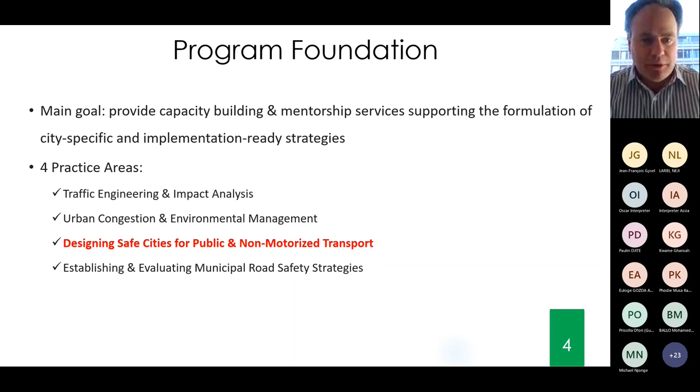So for those of you particularly interested in traffic safety, please note that we will meet again on March 8th, where we will progressively transition from the type of engineering and design good practices, which we will be covering today, to leadership and safety strategies at the urban level for African cities.

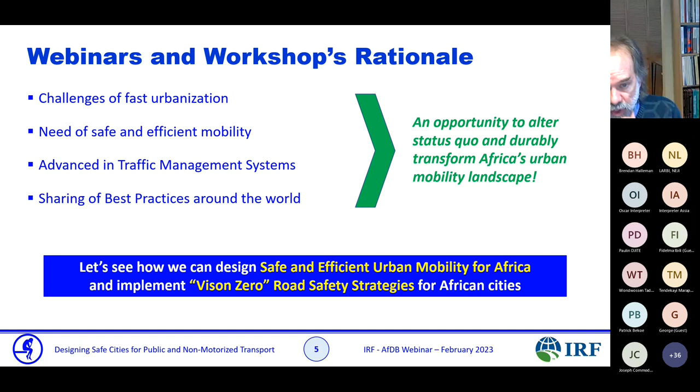So that's what we're going to be doing today. This first webinar will be talking more about engineering. The next webinar in March will be about Vision Zero and the kind of strategies and political requirements necessary for implementing Vision Zero for African cities. So we'll be talking about planning and engineering, focusing on vulnerable users, which are pedestrians, cyclists, transit users, and motorcyclists.

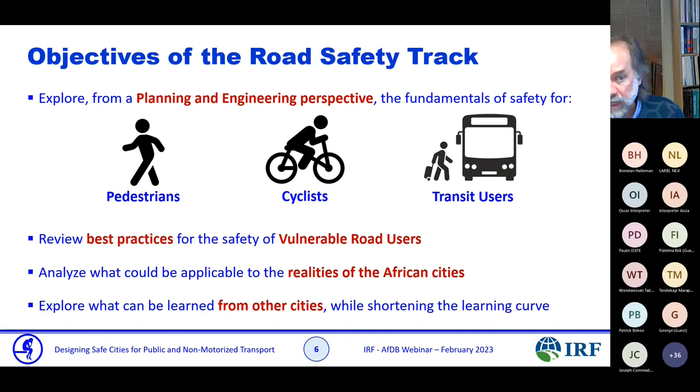We'll review best practices for those and try to analyze what could be applicable for the reality of African cities, and explore what can be learned from other cities while shortening the learning curve, so we can leapfrog a couple of steps.

This first webinar, the one today, will be exploring more the threats to life facing a wide number of road users in African cities. And I think that's very important. Being a vulnerable user, the key word here is vulnerable. How can we protect pedestrians, cyclists from being hurt by heavier, faster vehicles?

So we need to look at their needs. They need to be able to go from point A to point B in a safe manner. We'll talk about how we can separate VRUs from heavier and faster vehicles, and how we can set up appropriate speed limits. Putting a speed limit which is not appropriate, not credible, not in relationship or coherence with the road geometry doesn't make sense at all, because it won't be respected.

And also we'll look at different street guidelines and how we can apply them. But first, I'll just spend a few minutes talking about the stats on the African context and road safety. Even though Brendan talked about it, it's good to look at that in more detail.

So today, or in 2025, most of the world's biggest cities are in Asia. We're talking about Tokyo, Shanghai, Delhi, Dhaka, but by the end of the century, it's going to be in Africa. That's where the biggest cities are going to be concentrated within the next 50 or 60 years, and that's going to highlight even more the necessity to have safe and efficient mobility, especially for vulnerable users.

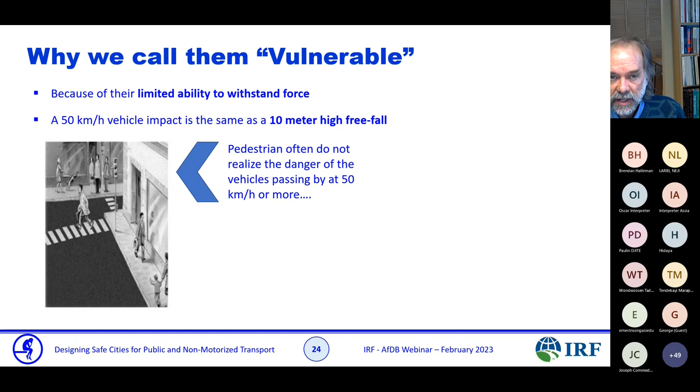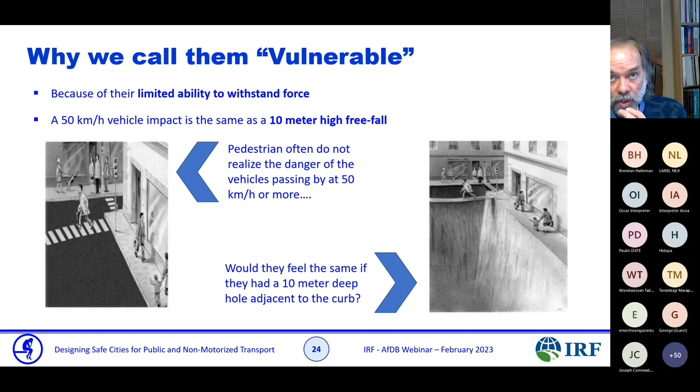Why do we call them vulnerable? Because they don't have the ability to withstand the force of impact. At 50 kilometers an hour, a vehicle impact is the same as falling from a 10-meter high wall. It's hard to imagine, so I'll show you a picture. Pedestrians don't realize that walking on the curb or crossing the street is exactly the same as being next to a 10-meter deep hole adjacent to the curb. If people could see a deep hole right next to them, they would be scared and would not get close to it. But we don't see it, we don't realize it, so we walk very close to the car, and people get hurt. We should know that and be aware of it.

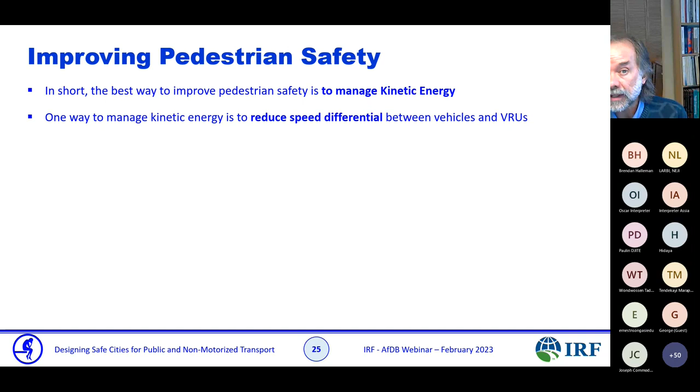How do we improve pedestrian safety? The best way is to manage kinetic energy. One way of doing it is to reduce the speed differential between vehicles and vulnerable users. The less the speed differential, the less likeliness of an impact causing injury or death.

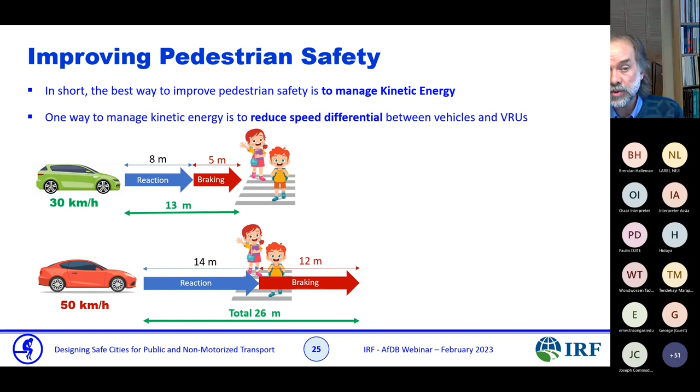For example, if there is an upcoming vehicle at 30 kilometers an hour and the driver sees children crossing the street, it takes about 8 meters of reaction time to step on the brake, and another 5 meters to stop, which leads to 13 meters, and it would stop in time. At 50 kilometers an hour, it's not going to work, because it takes 14 meters to react and another 12 meters to brake, which is 26 meters, meaning they're going to drive over the kids.

That's what it's all about, and that's why we're talking about reducing speed. It makes a lot of difference. The slower the vehicle, the more chance you have to avoid a crash, and if there is a crash, the impact is going to be less. At 30 kilometers an hour, your chance of survival is 90%. At 50, it goes down to 20%. At 70 kilometers an hour, you have no chance of surviving because your body cannot sustain the impact. You are going to die, for sure.

That's why we reduce speed and push for reducing speed near schools, hospitals, playgrounds, and other areas with pedestrian activity. This is something we should look into for African cities, because there are a lot of activities alongside the roadways, and vehicles driving by at 80 or 100 kilometers an hour very close to vulnerable users. They have absolutely no chance of survival if a vehicle hits a pedestrian on the side of the road.

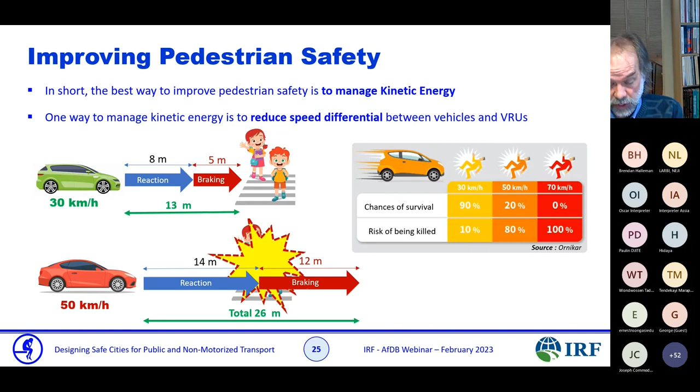So how do we improve pedestrian safety? First, we manage speed, adapting speed limits to the street function and local context. Speed needs to be in accordance with what's happening there. One issue in African cities is national roads crossing villages where the road stays the same - straight roads going through with just a 30 kilometers an hour sign. But if the road itself doesn't change, if there's no geometric design showing a difference, people will drive fast no matter what the sign says. We'll show you how to address this.

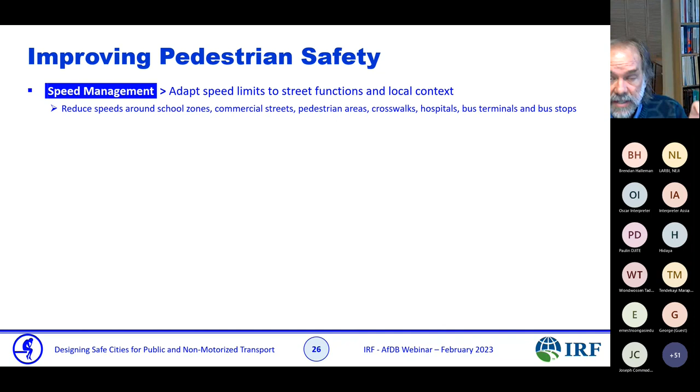We need to reduce speed around school zones, commercial streets, pedestrian areas, crosswalks, hospitals, bus terminals, and bus stops - all places with vulnerable road user activity. The other thing is signs and markings. We need to make sure motorists are informed about pedestrian activities. There are many signs and markings that exist to warn drivers, such as crosswalks, which can be controlled or uncontrolled.

We have stop lines, signs for schools, playgrounds, health centers. We need to use those. The idea is to tell motorists, watch out, they are vulnerable users. As I said, some people won't look at that, because some motorists won't, but most motorists do, and we need to talk to the majority of them. We need to tell people to behave properly, and when it is well done, people do behave properly.

The other thing is physical separation. We need to separate the motorized vehicle flow from pedestrians, cyclists, and motorcyclists through overpasses, tunnels, curbside barriers, bicycle paths and lanes, dedicated lanes for motorcycles, and I'll show you a couple of pictures. All of those actions are improving safety one way or another. There is no one solution, but it's a recipe of many elements that's going to improve safety. That's what we look at. So we can implement a lot of small things that are going to improve safety overall.

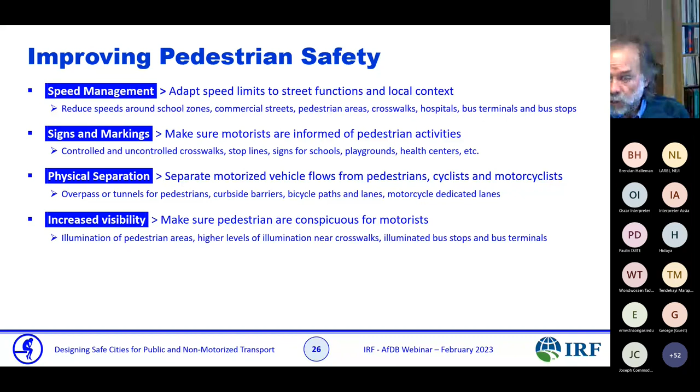Another point is to increase visibility. Very often pedestrians are not seen. And when a pedestrian is hit, one of the things the motorist says very often is that I did not see him or her. So we need to make them conspicuous for motorists. We need to have proper illumination of pedestrian areas, higher level of illumination near crosswalks, illuminated bus stops. We need to find ways to make sure that VRUs can be seen.

The last point, which is not the least, is appropriate infrastructure. We need to make sure that pedestrians can walk safely and away from traffic. We need to design paths and curbsides and areas where they can walk safely. Those need to be large enough, they need to be free of obstacles.

We need to have space for parking, because if it's full of parked vehicles, it's not going to work. It needs to be well drained and well lighted as well. If there are puddles of water, pedestrians are going to go around it, and they're going to walk on the road to avoid walking in the water.

So we need to have a network that connects major points of interest, being commercial, institutional, health, and making sure that pedestrians can go from one to another or reach out to the public transit access point easily.

Another point is universal accessibility. That is allowing people in wheelchairs, or people who have difficulty walking, blind people, deaf people, to be able to walk and use the network, and have proper guidance in order to avoid them being in conflict with motorists.

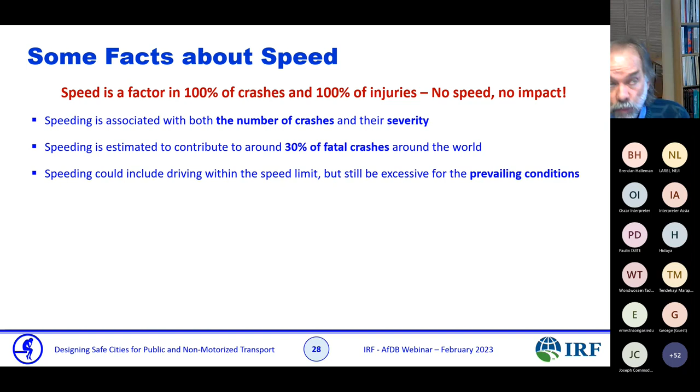Speeding could include driving within the speed limit, but still be excessive for the prevailing condition. And we see that very often. That's why actually in many cities in the world, the speed limit in cities is limited to 50 kilometers an hour, while now it has been reduced to 40. And some cities, for example, Amsterdam in Netherlands, is reducing it to 30 kilometers an hour. So we are realizing that if there are vulnerable users, we need to reduce speeds, and we'll see how to do this.

Some part of the road should be dedicated for mobility. Those are major arteries, freeways, where vehicles can drive fast. But on those, we should not have vulnerable users. So when we have vulnerable users in local streets, in smaller arterials or collectors, we should make sure that speed is lower.

I talked about kinetic energy. I'll come back to it very fast, but many people don't know the formula. What I would like to show here is that the kinetic energy of a vehicle is proportional to the square of its speed. So the risk of death for a pedestrian is not twice, but it's 4 times greater when hit by a vehicle at 65 compared to 50, because it's not linear. So that's something we should take into account.

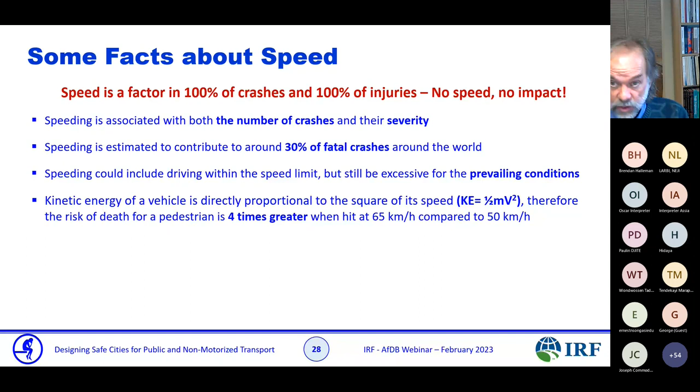Reducing the speed from 50 kilometers an hour, where your chance of survival is about 20%, to 30 kilometers an hour raises your survival chance to 90%. That's exactly why we talk about reducing speed near school zones and where there are vulnerable users.

Travel speed also affects the driver's ability to accurately and reliably process information. The faster you go, the narrower your visual field becomes, so you don't see the roadsides well—you don't really see them at all when you drive fast. So you're not able to see danger, hazards, or vulnerable users on the side of the road.

However, high-level information processing is critical in a demanding environment when there are VRUs. That's another reason for reducing speed in areas where there are pedestrians, because the driver's ability to process information is slower. So speed management is absolutely essential to protect VRUs.

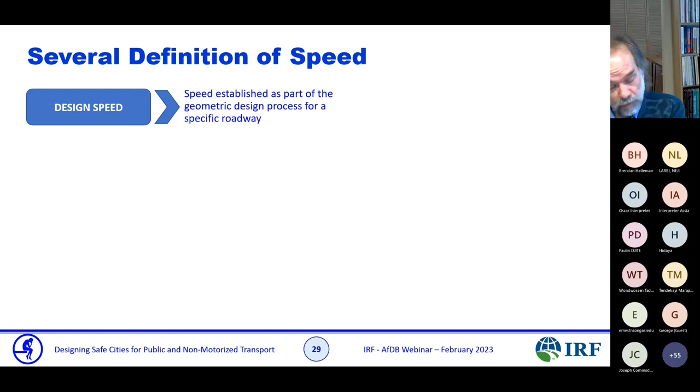There are several definitions of speed. I won't go too much into detail, but just to make sure you understand what we're talking about: design speed is the speed we use as part of the geometric design process to design a road. It could be 100 kilometers an hour for a freeway, or 30, 40, or 50 kilometers an hour for a local street.

Operating speed is the speed at which vehicles are observed during free flow conditions, which is not the same as the design speed—it could be higher or lower, but it's the speed at which vehicles are actually driving. For example, on major arteries in urban cities, on a wide boulevard the speed limit could be 50 kilometers an hour, but because it's straight and wide with wide lanes, people tend to drive faster. On the other hand, on very narrow streets the speed limit can also be 50, but the operating speed is much slower because motorists are afraid of hitting something—there are parked vehicles, pedestrians—so they drive slower.

So it's not related to the speed limit, which is a posted speed we can see here—that's the maximum lawful speed for a particular location as displayed on the signs.

Statutory speed is the speed limit established by the governing agency. For example, in France the speed limit for freeways is 130 kilometers an hour. In the Emirates, it's 160. In Canada, we take safety very much into account, so the speed limit on our freeways is only 100 kilometers an hour. So it depends on the country and the governing agency.

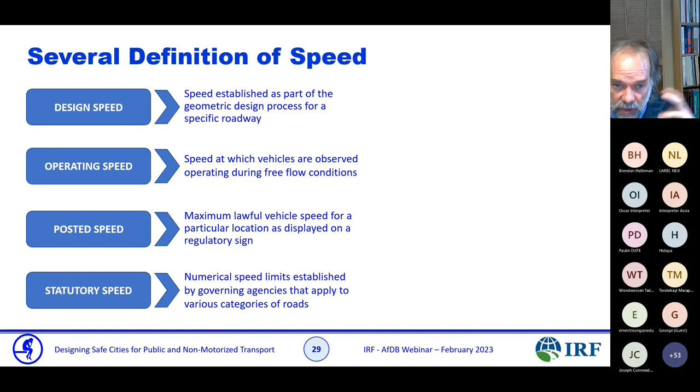That's why pedestrian safety has two levels, and I'll talk about it a little more: it has to be top down, where government takes action, but it also has to be bottom up, where we can have local action directly on the street—concrete action to improve safety.

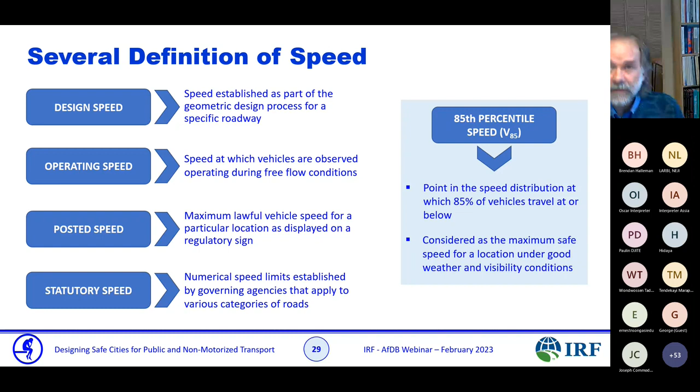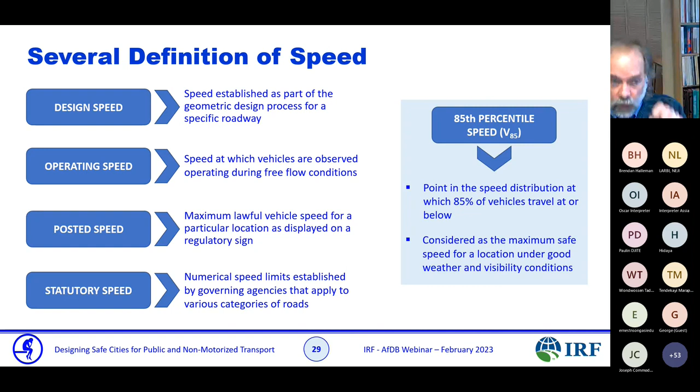The last point I wanted to talk about is the 85th percentile speed. That's something we use very much in engineering—it's a point in the speed distribution at which 85% of vehicles travel at or below. It's considered the maximum safe speed for a location under good weather and visibility conditions. So those are just facts to keep in mind when you do your design, when you think about your own area—how can you improve? You should know those definitions of speed and the right one to use.

There are a few consequences of speeding for drivers. As I said, it reduces the visual field and the ability to accurately and reliably process information. There is more distance traveled during the perception and reaction time because we are driving faster, stopping distances are longer, and there is greater potential for loss of control of vehicles.

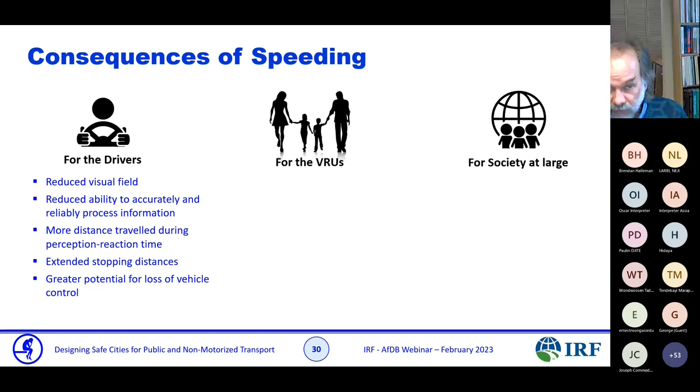For VRUs, there is an increased feeling of insecurity when vehicles are speeding, reduced time to cross the street, reduced time to react to an event, increased severity of injuries, and obviously increased death probabilities in crashes. And for society at large, we should take this into account as well: more speeding means more fuel consumption, more noise, more vibration, more pollution—we should keep the environment in mind.

So what's happening in speed management currently is that the speed limit used to be aligned to driver preference for high speed travel.

As roads were being built and vehicles became more performant, people tend to drive faster and faster. It took a long time before we started limiting and reducing speed on highways. Before that, it was open, and in some countries it's still wide open. For example, in Germany on the Autobahn, you can drive as fast as you want on some sections, which is kind of scary. But statistics show they don't have more accidents than average. However, when they do have accidents, they are really bad, usually because of the speed.

Another point which is quite interesting is that most drivers tend to underestimate the likelihood of an adverse event that may cause harm. Most drivers don't think about a hazard.

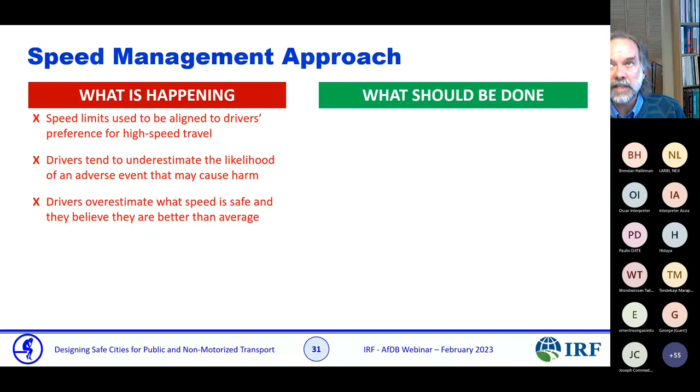So people tend to underestimate the risks. Another thing drivers tend to do is overestimate what speed is safe for themselves and others. There were many surveys showing that people believe they drive better than others. Most drivers think they are better drivers than average, which is obviously not true. When we see the number of accidents that happen, it's not good.

And the last point is that drivers are not good at perceiving many risks, in particular when there are hazardous roadside objects. People think in series, not in parallel - we can do one thing well at a time, not too many things at once. When there's a lot of action, a lot of stimuli for the driver, they cannot perceive the risk properly.

So what should be done? We should manage speed, and the focus is not to lower the speed all over. Despite what I said previously, the idea is not to put everything at 30 kilometers an hour. That's not the point. The point is to match mobility needs with the surrounding environment, the infrastructure, and the safety. And that's not easy to do.

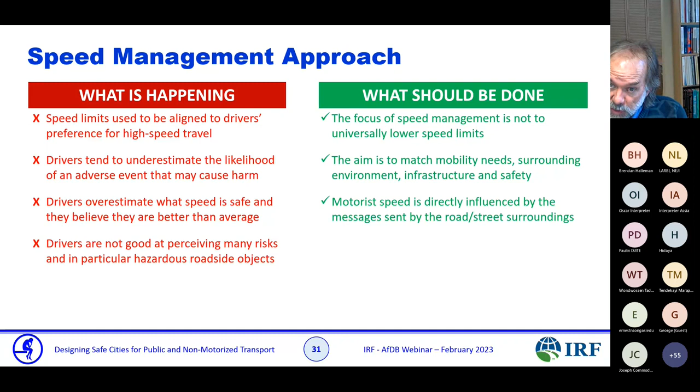Motorist speed is directly influenced by the message sent by the road and street surroundings. So here we are talking about coherence between geometry and speed, and that's what we do. I'll show you a couple of examples of how we do this.

But we should let the road talk to the motorist. If the road is straight and wide, people are going to drive fast. If it's narrow, if there are obstacles on the road, if there are markings and obstacles that push them to reduce speed, they're going to do it much more than any sign or marking on the road.

And speed limits must be established to take into account the human biomechanical tolerance limit. It's really crazy to allow vehicles to drive over 50 kilometers an hour near vulnerable users, because the biomechanical tolerance of a human is not going to work if they get hit - they're going to be injured severely or die. So that's what we need to avoid.

So notwithstanding the extent of speeding on our roads, surprisingly, the posted speed limit is still acknowledged as being the most powerful mechanism for influencing speed choice. So we should use that. We should post the right speed limit, but not do it by itself - we should complement the posted speed limit with a lot of engineering, with different solutions, traffic calming devices that I'm going to be talking about, that will help reinforce the message that the posted speed limit does.

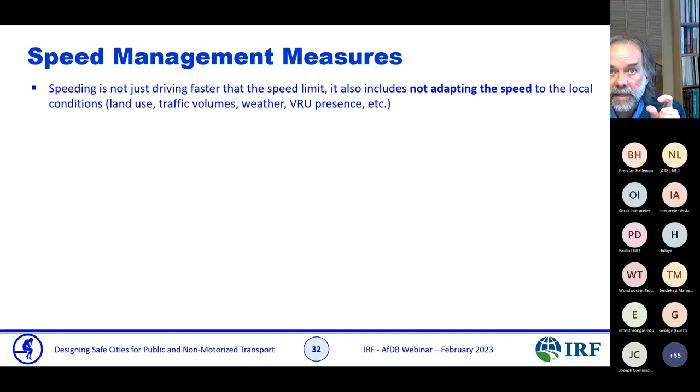So speeding is not just driving faster than the speed limit - it also includes not adapting the speed to local conditions. That's important to know. Speed limit setting should take into account the type of road user, as I said, and the safety quality of the infrastructure. Sometimes the infrastructure does not allow for higher speed because it's not in good shape, it's not well drained, and we should take this into account.

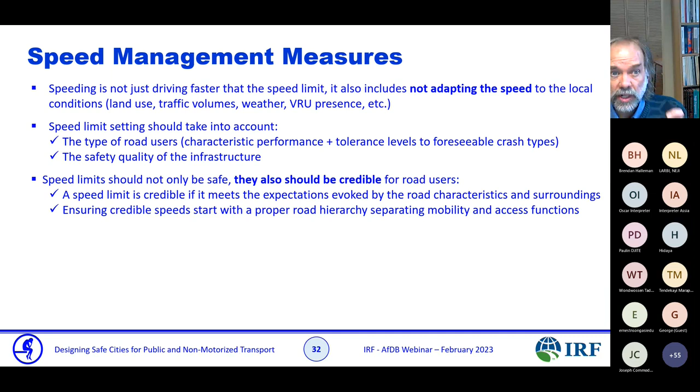Speed limits should not only be safe, they should also be credible for road users. That's an extremely important point here. A speed limit is credible if it meets the expectation evoked by the road characteristics and surroundings. I don't have it with me, but I took a picture of a road in Latin America.

I was driving on a highway, which is wide and straight, and at one spot there was a speed sign which said speed limit 30 kilometers an hour, which didn't make sense at all. I stopped there because I wanted to see if it had any effect, and nobody reduced speed because it doesn't make sense. So if it's not credible, motorists won't respect it.

We need to make sure it's credible, making sure we use the right road hierarchy, and we see the difference between mobility and access function. I'll talk more about this in a couple of seconds. So speed management requires several initiatives: setting appropriate and credible speed limits, adapting infrastructure and road geometry to the targeted speed, and ensuring adequate enforcement of the speed limit.

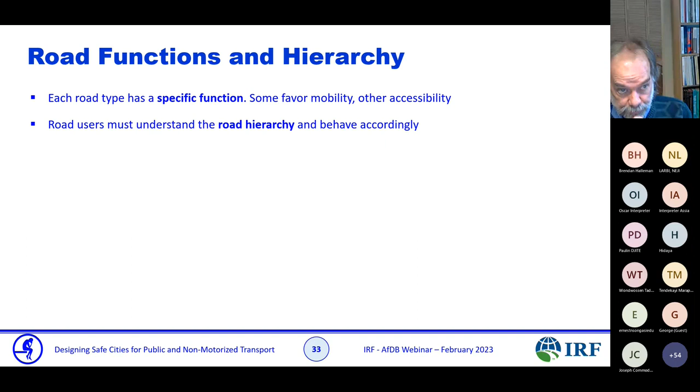So each road has a specific function. Some favor mobility and some favor accessibility. Road users must understand the road hierarchy and behave accordingly. Vulnerable road users and commercial activity must be controlled to reduce the incompatibility of mixed functions. That's very specific to Africa. We should look into that specifically.

Road designers and land planners should stop favoring motor vehicles to the detriment of vulnerable road users. That's been one of the main trends of perhaps the last 20 years, and the Decade of Road Safety has been implementing change. We have been focusing very much on motor vehicles. The car was the king of the road. It should not be this way anymore.

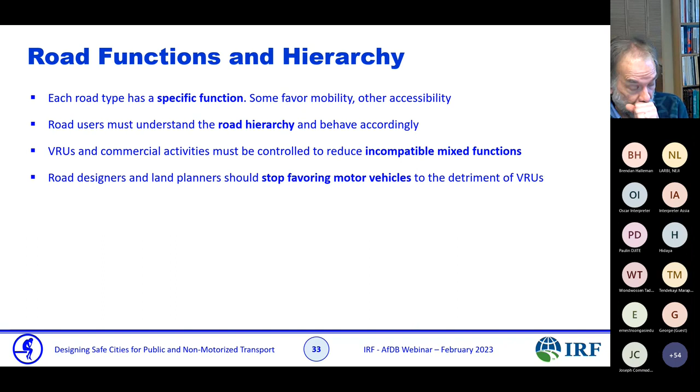We should favor much more active transportation. We should protect vulnerable users because it's good for health, because it's what most people can do, walk and use their bicycles, and it's cheaper and better for the environment. So motor vehicles and cars, I'm not saying they are not good and we should not use them, but they should not be at the center of all we do.

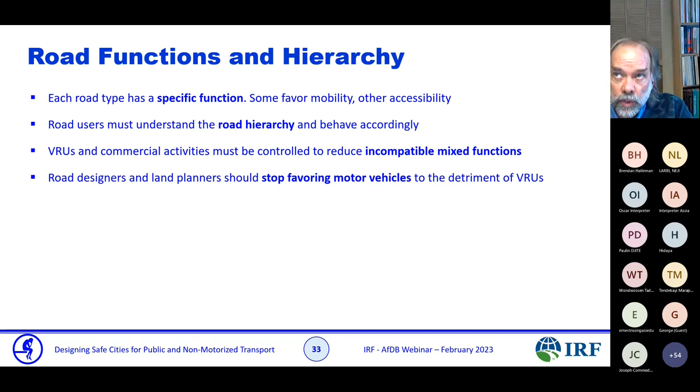What should be at the center of what you do is the human. We should have a human-centric design and reflection. That's my next point here. Road designers and land planners should develop a human-centric approach in their work. We should develop, I'll show you how, a bottom-up vulnerable user scheme.

So start from what the local conditions are, what are the possibilities to work specifically on the local area to improve the pedestrian network, sidewalks, curbs, signing, design. And at the same time, we should have top-down government initiatives and bylaws that will help that.

The other thing we should try to do is make the best use of advanced technology. As you know, we are going into the Internet of Things. Vehicles are going to be more and more connected to the road and to other vehicles, and we should try to see how we can use that to improve and enhance mobility and safety, which is quite interesting. So what I'm afraid of, and that's why I wrote this last sentence here, is that we could leapfrog, because technology allows that.

However, it's important to progress step by step. In many African countries, for example, the phone network has not been well developed, and you went directly from not having phones to mobile phones with Wi-Fi, skipping the fixed line network that we did have, which is fine.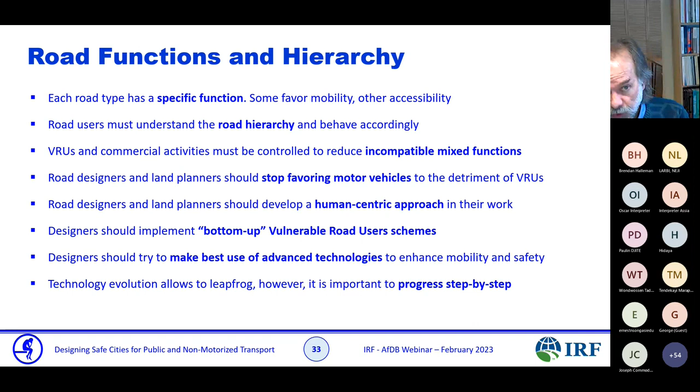But by jumping over that, sometimes you are jumping over very important actions. So remember that in the way you work, you need to progress step by step and make sure you can use experience from others and what they've done, as I said before, on the positive side, but also on the negative side. Road hierarchy, here I show you a quick picture.

This is what road hierarchy looks like. On the left-hand side, you can see a freeway. You can see it has separate lanes. There are no accesses. Cars can drive fast. There are no vulnerable users on the road. So that's what it looks like.

On the top center here, you've got a highway or main arterial, which is a wider road. You have controlled access, you have traffic lights, and usually the vulnerable users are separated. You've got curbs and sidewalks, you've got bicycle lanes. Then in green here, you've got collectors, which are narrower streets with curbs.

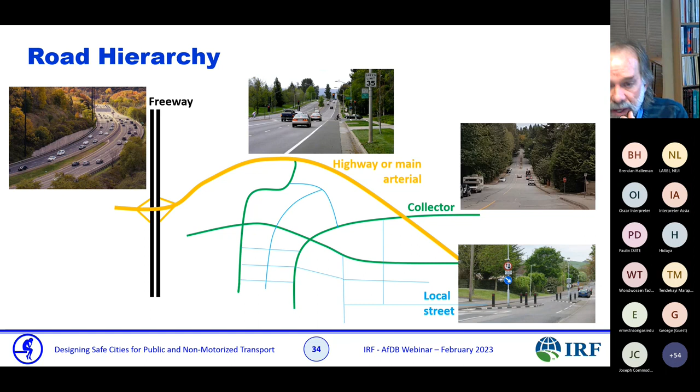You've got parked cars, and eventually you can come to a local street where you can have very specific traffic calming devices you can implement. Here you can see a chicane that helps reduce the speed of vehicles.

Very often, national roads cross linear villages without any modification of the road geometric design. So we should warn motorists that you are entering a village, entering commercial activities. You should have markings, signs, speed bumps, gateways that will help you, telling people to watch out for vulnerable users.

Speed limits are not credible due to a lack of coherence with the surrounding environment. There are too many uncontrolled roadside activities along the road, and uncontrolled commercial activities and street vendors within the right-of-ways. That's something we should look into and try to control.

Also, there is an issue with parking space for motor vehicles. They need to stop their car, and very often there is no space, so they park directly on the road. So, speed management program process, how do you do it?

Well, you need to identify speeding issues, determine partnering agencies—that's something that should be done in coordination—identify countermeasures, implement countermeasures, and evaluate the project and program to make sure that it's working.

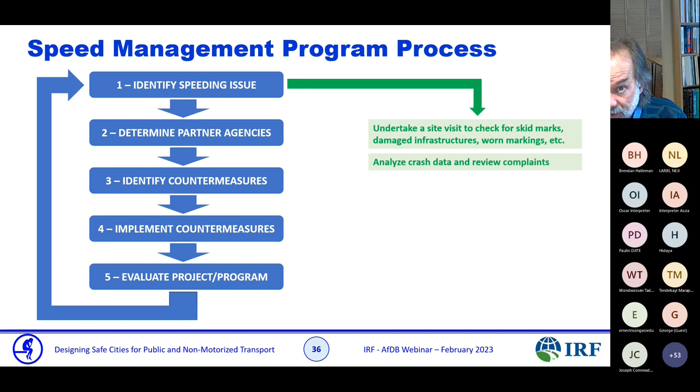You go there and look at what's happening. Are there skid marks, damaged infrastructure, worn marking, crash data? Do you have crash data, and do you have people's complaints that cars are driving too fast?

You should do a speed spot check and validate the data. Is it an issue or not? Very often people perceive speed as going too fast, but when you do a spot check, it's not going too fast—it's just a perception.

You should analyze the coherence between posted speed limit and the surrounding environment. If you have a national road with a speed of 60, 70, or 80 kilometers an hour near commercial activities and vulnerable users, it's not proper—it's not coherent. You should search for unexpected conditions or types of activities.

For example, VRU presence. You should review the relevance of information conveyed to the motorist about the area. Is the motorist aware of commercial activities and vulnerable road users? Is the motorist well informed in advance of a danger?

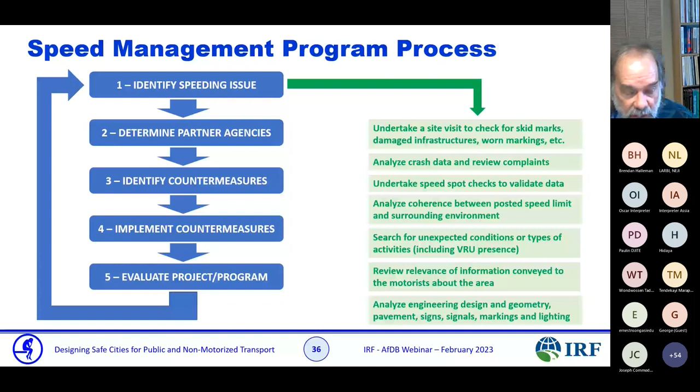And of course, engineering design: geometry, pavement, signs, signals, marking. I'll show you examples in a couple of minutes of all of what I'm talking about, with pictures.

Speed management tools, we'll talk about this also in the next webinar, but we should implement a safe system approach. A safe system approach is safe road, safe speed, safe vehicle, safe people. It's not only safe road or reducing speed—it's a global approach that takes into account the different elements: vehicle, people, speed, roads, and making sure that all of them are safe.

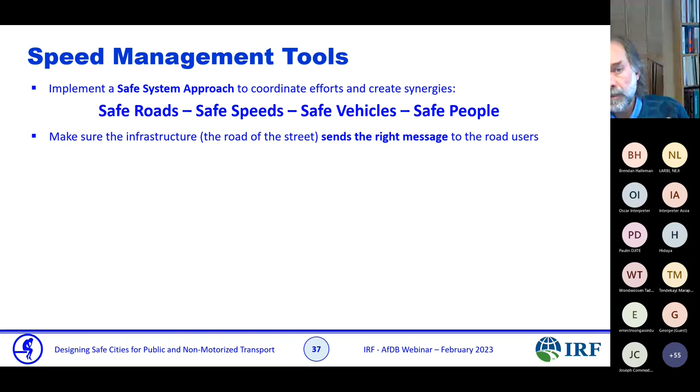We should make sure the infrastructure—as I said, and I know I'm repeating myself, but I do it on purpose—sends the right message to the road user. We need to help drivers see and understand the risk by posting credible speed limits. If it's not credible, they won't look at it and they won't understand the risk.

We should have awareness campaigns. We should enforce the speed limit with police control and fines. I know that's very difficult in many low-income countries. In many countries there is a lot of corruption, and people can easily, instead of paying the fine, give a little money to the policeman and say, let me go. That's very much linked with the income of the country. I'm fully aware of that, but it's something we should work on.

One way to improve safety is both the carrot and the stick. The carrot is, we should congratulate people for behaving properly, but we should use the stick to tell them that's not the way to do it. That's not an easy balance to get, but we should be working on that.

We should educate all road users. As I said, pedestrians and cyclists are not licensed—they don't know the rules of the road. We should inform them and make them aware of the danger of the road.

We should impose vehicle speed reductions through implementation of traffic calming devices—we'll be showing that in a couple of seconds. So the way of looking at it is, first we'll start with adequate engineering and design speed.

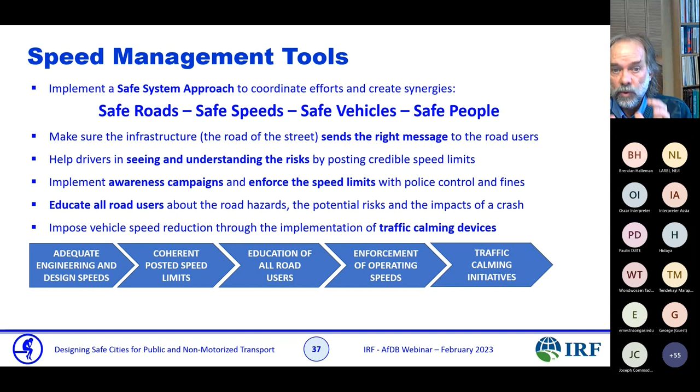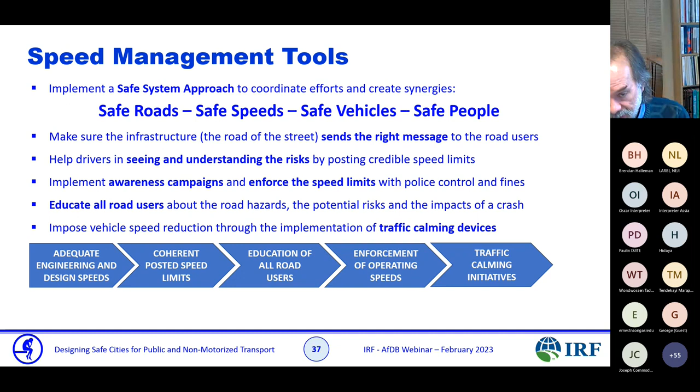We'll make sure that we have coherent posted speed limits. We need to make sure that all road users are well educated, that we've got proper enforcement, and we should start putting in traffic calming devices. On top of that, we should have self-explaining roads—roads that talk to the motorist by themselves. Another point is forgiving roads, because we know that people make mistakes.

So if a motorist or a vulnerable user does make a mistake, is there a way to avoid a major injury or death? Can we implement physical constraints to make sure that if a vehicle goes off the road, it's not going to fall off a cliff or drive onto the curb? And the last point is making sure we've got proper emergency services if there is an accident. It's after the fact. The best idea is to avoid an accident, but if there is one, how can we limit the consequences? We'll talk about all this in the next webinar.

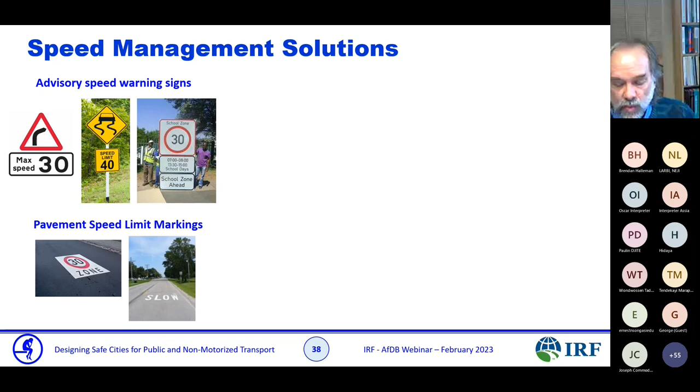I've seen it actually: road signs are being stolen by people because they need the metal and they can sell it back. So one way of dealing with this is painting on the road. It's very difficult to steal painting on the road, whereas it's easier to steal signs. So that's another way of doing it.

One thing that's very efficient, and I know it's not easy to implement in many countries, is speed-activated signs. You show the speed limit and you show the speed of the vehicle, and that's extremely efficient. When people see they're driving much faster than the speed limit, they're going to reduce speed, because by themselves they believe they are within the speed limit.

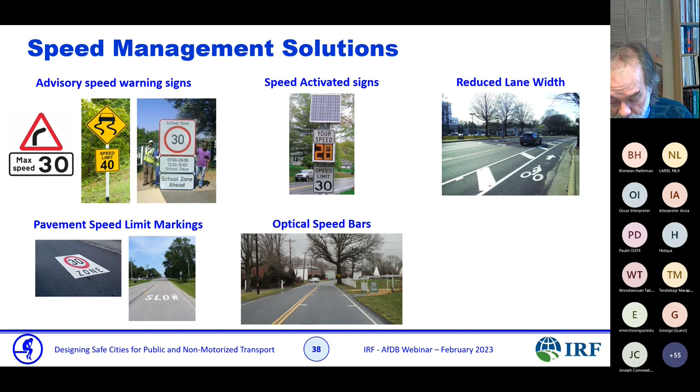But if it flashes at them, it's going to improve and they're going to reduce speed. Another thing which is working well is optical speed bars. Those are small bars along the road, as you can see in the picture, and that creates an effect of narrowness for the driver. By instinct, the motorist is going to reduce speed because he feels it's narrower, and that's quite efficient. Reducing lane width is the same thing, it just makes people think it's narrower, so they drive slower.

Another thing is center islands, raised medians. This gives pedestrians a chance to cross the road in two parts, and while they are waiting in the middle of the road, they are safe because they're on an island and somewhat protected.

Another thing is road diet. For many years we've been increasing the number of lanes, and in some cities like San Francisco, Los Angeles, Toronto, you get highways of 12, 13, 14 lanes, which doesn't make sense because it just creates congestion. So one of the things we do is what we call a road diet. Instead of having two lanes per direction, as shown in the picture, we put in one bicycle path, one lane per direction, and a center lane that allows double left turns. That's one thing we could do, and it helps reduce speed.

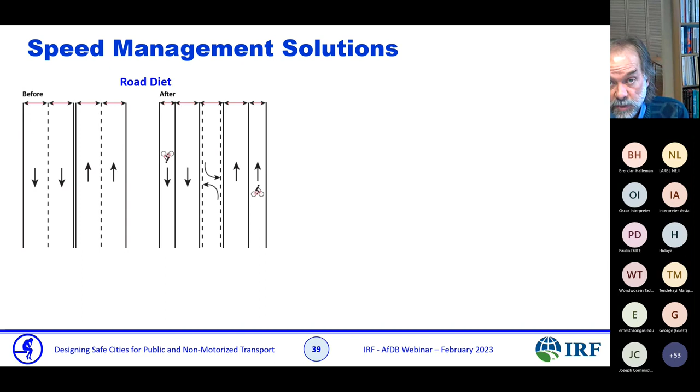Roundabouts are very efficient at reducing the number of conflict points. In comparison to a right-angle intersection, roundabouts are much safer, and they impose speed reduction as well.

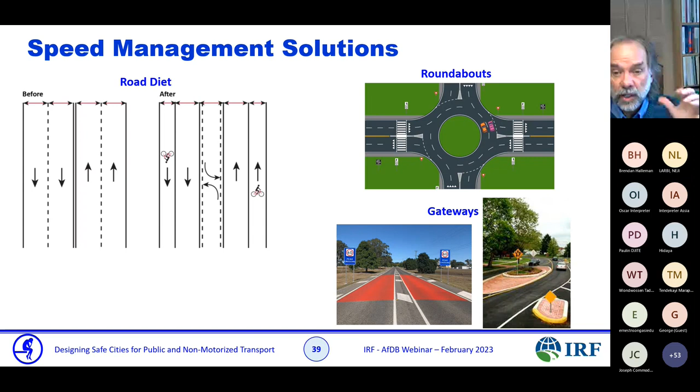Gateways are a way to say, watch out, you are entering a zone where the speed is going to be different, you should be reducing speed. Putting up a sign by itself is not going to be efficient, but gateways, where the driver can see or feel that the road is talking to him or her, make a huge difference. Gateways should be used in African countries much more than they are. That's one of the best, or the most efficient, devices that should be used in African cities.

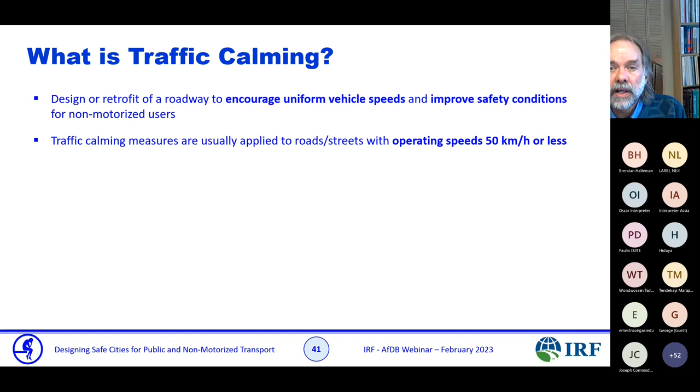Let's look at traffic calming quickly. Traffic calming is designed to encourage uniform vehicle speed and improve safety conditions, obviously for vulnerable road users, by implementing devices. They are usually used on streets or roads where the speed is lower than 50 kilometers an hour. Obviously, you cannot put a speed bump in the middle of a freeway, it doesn't make sense, you would create accidents. It has to be in places where the speed is already lower.

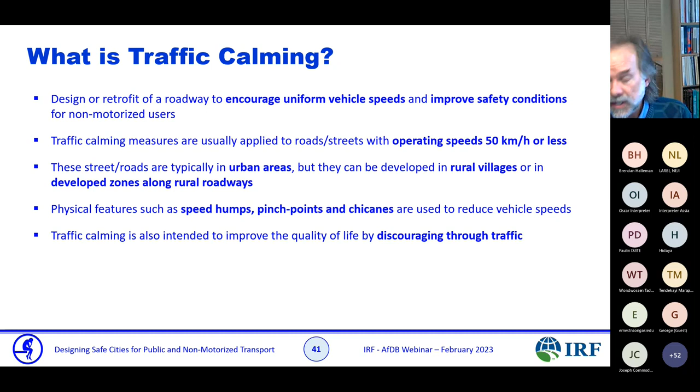Usually it's done in urban areas, or it can and should be done in rural villages. But if you do this, first of all you should have a gateway that tells motorists, watch out, we are going to be reducing speed. You need to make sure motorists reduce speed before you implement any traffic calming device. These can be speed humps, pinch points, chicanes, or other methods. I'll show you a couple of examples. The idea is also to discourage through traffic — sometimes people use local streets to bypass congested areas, and you want to discourage that by prohibiting through traffic.

Another important point is that this should be a community-wide strategy, not a local street-by-street initiative. You should not put a speed bump somewhere on a street by itself. That should be done within a neighborhood-wide vision.

Traffic calming solutions, I'll show you a couple. Speed hump: here you can see the picture of the solution, and the drawing on the left-hand side, a top view at the same time. Speed humps are very efficient to reduce speed.

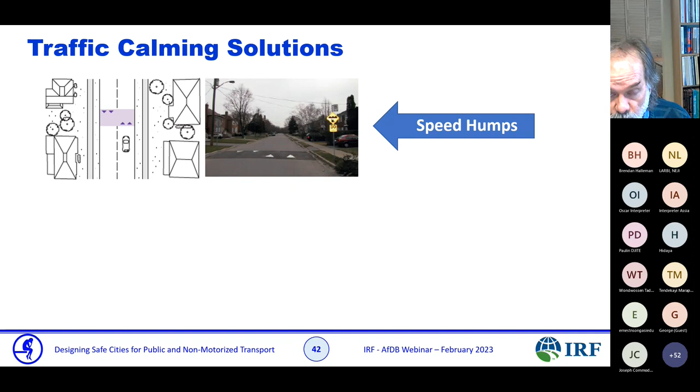Raised intersection, sometimes called speed tables. The intersection itself is raised, which protects vulnerable users and forces vehicles to reduce speed. Otherwise, they're going to break the car.

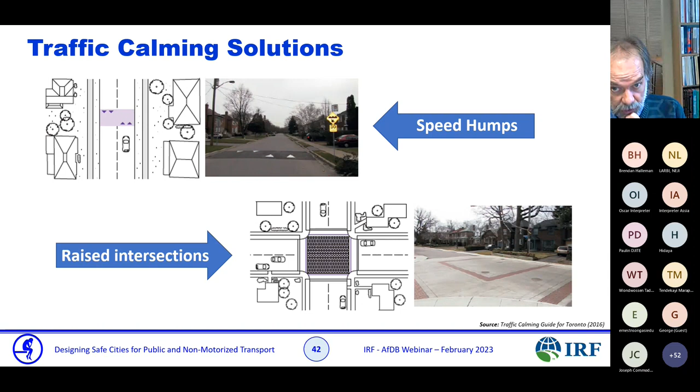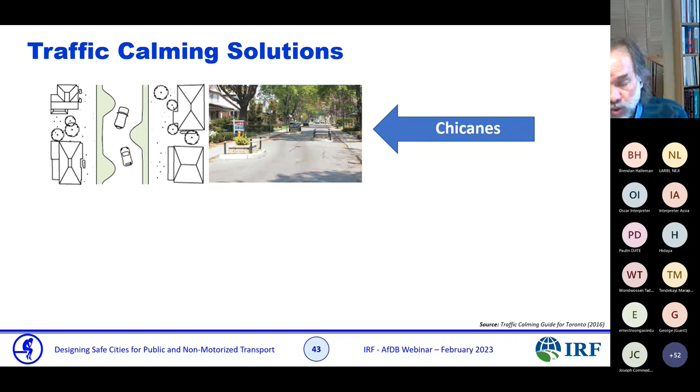Chicanes: here you can see the driver has to drive around obstacles, what we call chicanes, reducing speed to go through those left and right turns. We can do that through curb extension as well—we just extend the curb, and that provokes some kind of chicane, or half chicane perhaps. That helps very much.

All those examples, by the way, are taken from the city of Toronto, which is about 500 kilometers from Montreal, where I live. Traffic islands.

So you put some obstacles on the road, and of course those need to be conspicuous. I mean, motorists need to be able to see them quite well, but that's very efficient to reduce speed.

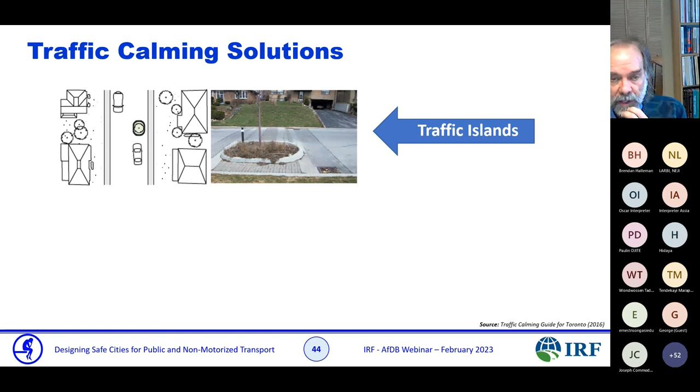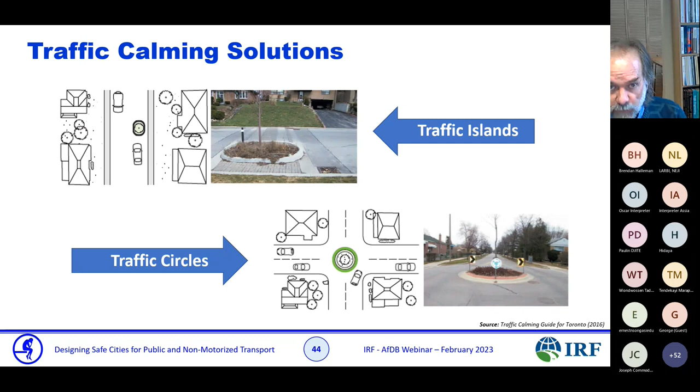Small traffic circles just impose some kind of movement on a driver, so they're going to be slower by using it. Bumps: in our cities, very often we've got alleys behind streets, often used for services and emergency services, and people tend to use them as shortcuts. So we put bumps so they reduce speed, because very often kids are playing in the alleys.

Curb extensions have two advantages: they reduce the crossing distance for pedestrians, so it's safer—they are less exposed—and at the same time they permit parking, protecting parked vehicles.

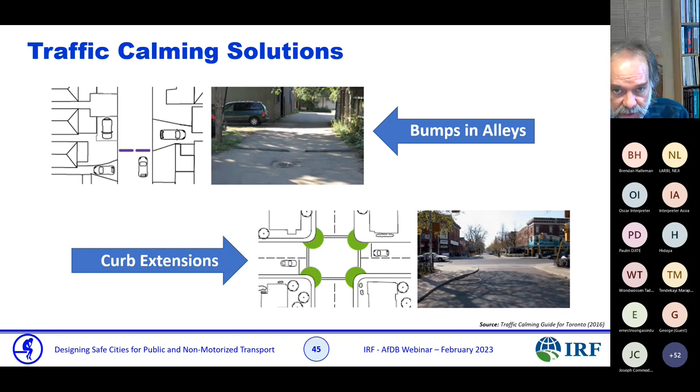On the previous one you saw curb extension, but curb radius reduction works as well, because the smaller the radius, the slower the speed. When it's almost a right angle, you cannot turn as fast as when the radius is higher.

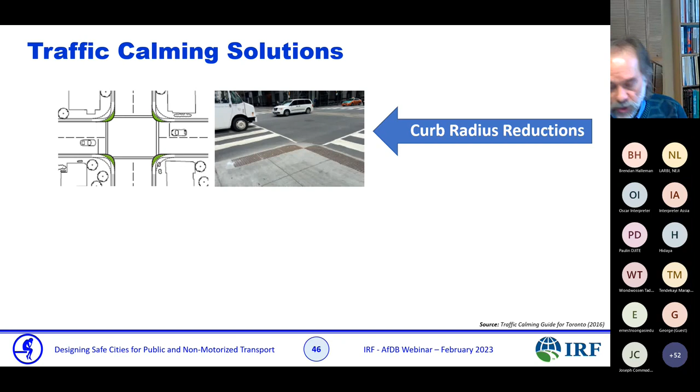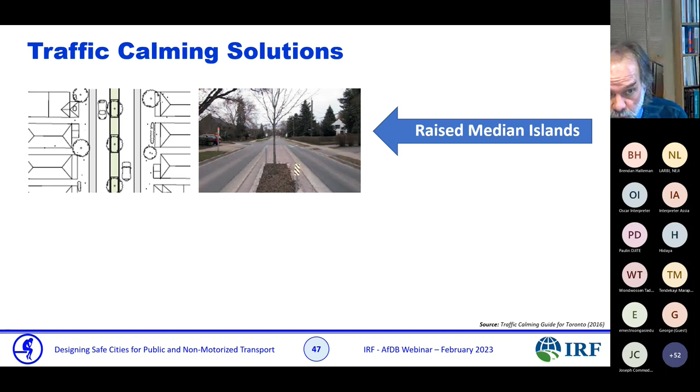Raised median island, I told you about that—it protects vulnerable users, as well as narrowing the lane width.

Directional closures: what we use sometimes is to make one-way streets, and one way of doing it is just putting an island, which closes one side of the street.

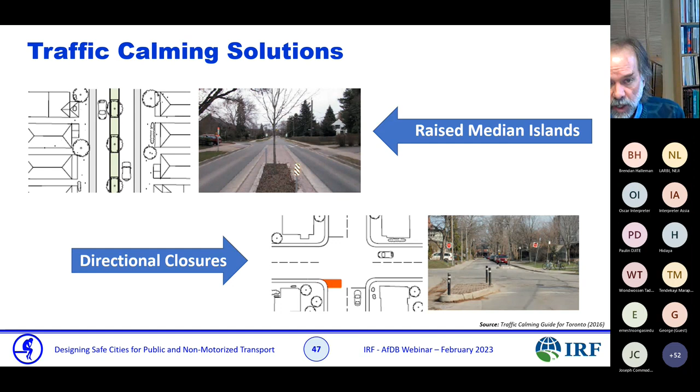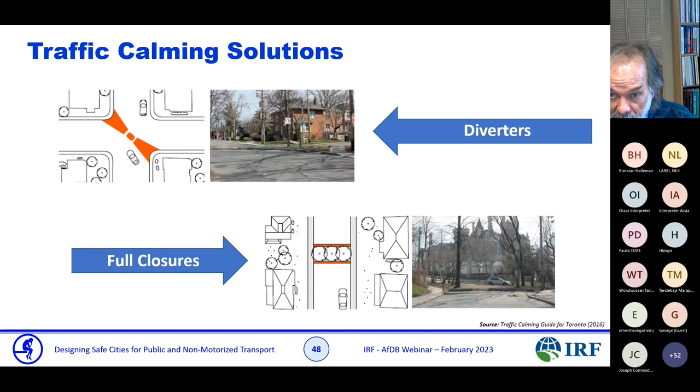Or full closure: in many cases they decide to close streets, and the street could become completely closed to vehicles, becoming a pedestrian street. We'll see a couple of examples of that.

Raised median through the intersection always works quite nicely. Speed humps, mini roundabouts, traffic circles—as you can see, we have a lot of devices we can use.

As a traffic calming device, I'll show you applications in the African context. That's the last part of the presentation.

Before that, what are the weaknesses that need to be improved, that we need to work on? One thing is the institutional framework for traffic management, which will be the object of the next webinar. It's quite poor in general in Africa, and we need to improve that.

We need better data. We don't have reliable data on traffic, safety, or mobility. The more data we have as engineers, the better we can work. There is also a lack of demand forecasting and analysis.

If we can forecast, and we need data to forecast, if we have data we can forecast, and we can forecast, we can design. So it's all linked. Traffic impact analysis, that's the other side of the webinars we are working on today. I'm on the road safety side, but traffic impact analysis is the other pillar. If we have proper traffic impact analysis for developments, you can right away implement the proper design.

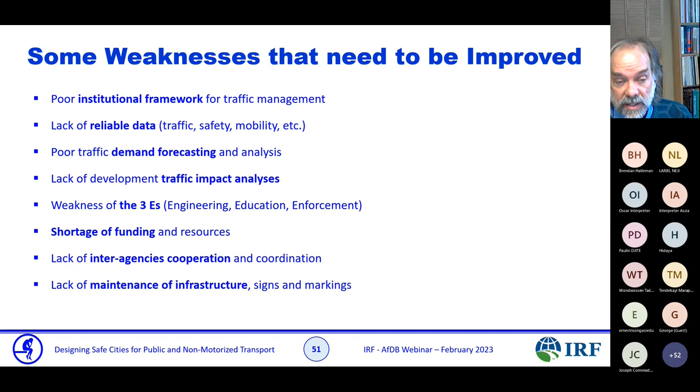The other thing is the famous 3E's: engineering, education, and enforcement. It's weak in Africa in terms of all three E's, both engineering, education, and enforcement. We need to reinforce that. Obviously one way of doing it is having more money. So there's a shortage of funding, we know that. There's also a lack of inter-agency cooperation and coordination. If agencies could work better together and cooperate and coordinate, that would help. And maintenance, infrastructure maintenance, signs and marking, that's something we need to work on.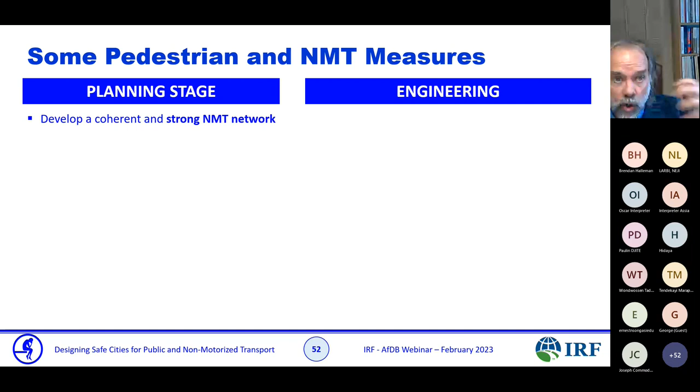So at the planning stage, what do we have to do: develop a coherent and strong non-motorized transport network, implement pedestrian-only streets and urban walking plans, build safe and signalized cycling corridors, enable easy transfer from individual transport to public transportation, implement park and ride hubs for motorized vehicles and cyclists, and reduce inconvenient and unsafe detours for pedestrians, and provide safe paths. It looks easy to say, it's not easy to implement, but that's what we should be working on.

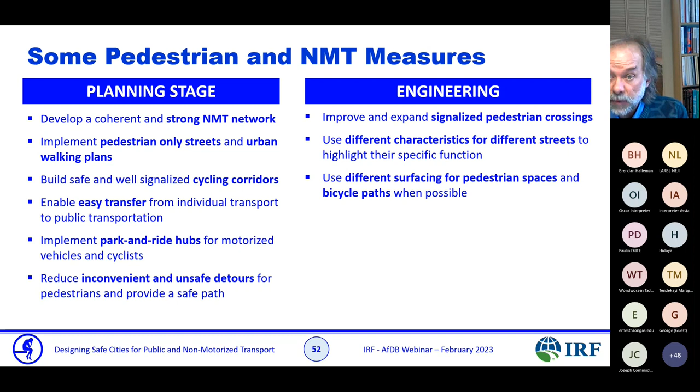In terms of engineering, what does it mean? It's improving and expanding signalized pedestrian crossings. We should have more of those, better designed and making them more visible. If we can, we should try to use different characteristics for different streets, making sure the street talks to the motorist and they understand the function of the street. We could use different surfacing for pedestrian space and bicycle paths whenever possible. That's very helpful in differentiating

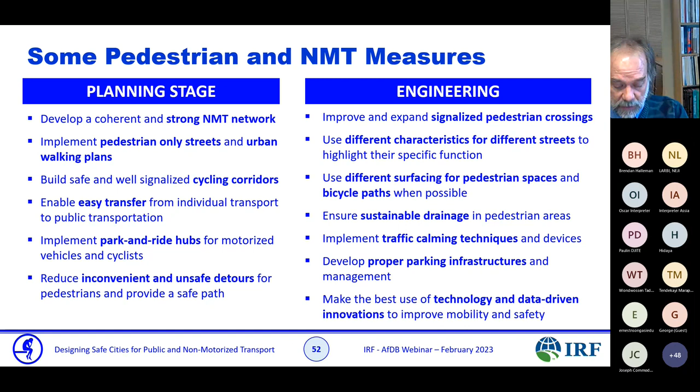where we can drive and where we should not be driving. Drainage is important for pedestrian areas. Very often the pedestrian areas are not well drained and people don't walk there because they cannot do it. So making sure it's well drained and well lit, that's good. Traffic calming techniques, parking infrastructure and management, and making the best use of technology and data-driven innovation.

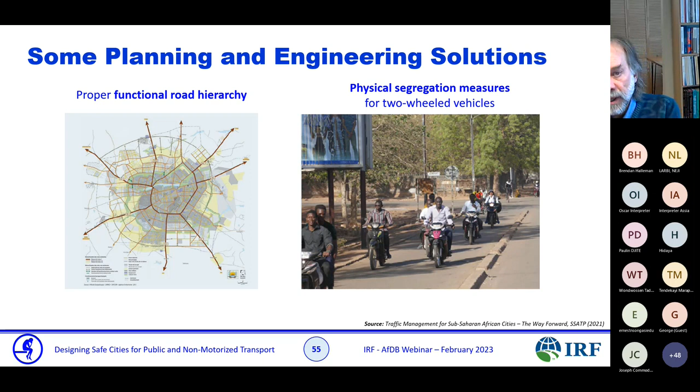Another thing we should have is a proper functional road hierarchy, as I said. I think on the left-hand side it's a picture of Ouagadougou in Burkina Faso, and they got a plan to have a proper road hierarchy. And as you can see on the right-hand side, the motorbike, no one is wearing a helmet, and that's driving me mad, but they should be wearing helmets. You can see that motorcycle, they've got their own lane through physical segregation, which is much safer than having them along with the general traffic.

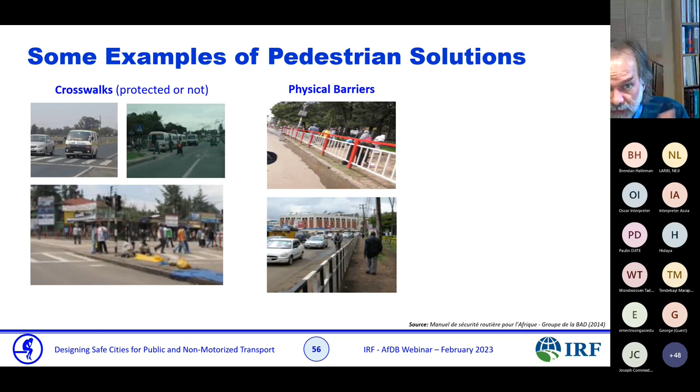Some other examples, all those are from Africa, so you can see crosswalks, they can be protected or not. Physical barriers to protect pedestrians, making sure that if a vehicle is driving up the road, they won't get hit. Pedestrian overpass, pedestrian island. I'm sorry, my pictures are not very clear and not very good, I just copied them from different manuals.

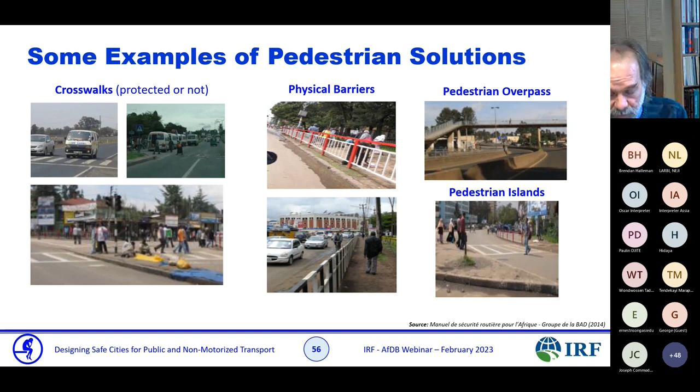Until noon they open again for cars, and then everybody leaves and they open for cars, which is quite good. It gives a place for people to walk safely and do exercise. I think it's an interesting approach, and as you can see in those cities, they can do it in Africa.

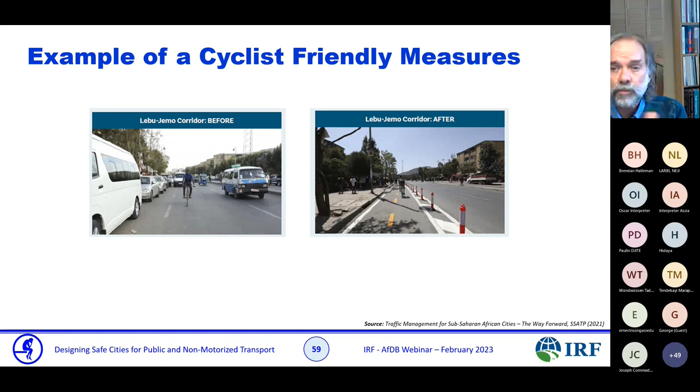A bicycle corridor - here you can see the Lebu-Jemo corridor. On the left hand side, the way it was before, you can see the cyclists in the middle of the road. Here on the right hand side, you can see they are protected. They've got their own bicycle path, and that's much safer.

Other type of solution: roadside activity regulation. We need to regulate roadside activities in Africa. That's one way to improve safety.

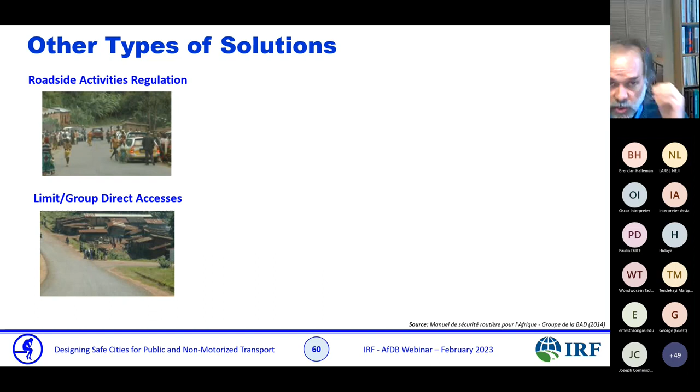We should limit or group access, making sure that where people want to cross the street we have a crosswalk, and we can regroup them at the same spot so they don't cross all over. We can do that through barriers or different solutions. We should try to separate cyclists and pedestrians.

There are a lot of people injured by cyclists on the sidewalks. A bicycle driving fast, hitting a pedestrian, can actually kill the person. So we should be very careful about that. Dedicated lane for motorcyclists - I already talked about that.

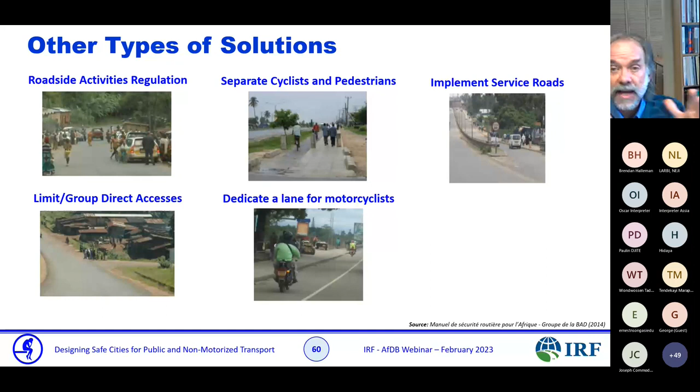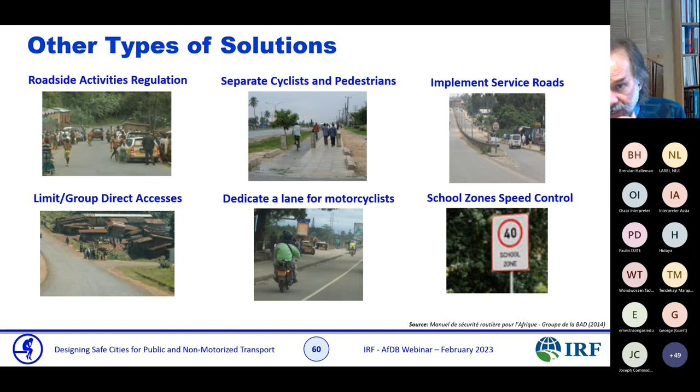Service roads - that's one way of protecting roadside activities. We create a service road which is alongside the main road, so on the service roads you can have more activities and vulnerable users, and you avoid having them on the main road. And of course, speed control.

So in conclusion, what do we need to do? We need to make the best use of the road network by managing and controlling traffic activities, provide practical, safe, and efficient, comfortable mobility for vulnerable users, maintain and increase the modal share for non-motorized transport by making the transit user experience easier and safer, and finally improve efficiency and safety of all transportation modes while minimizing environmental footprint.

And how do we do that? I told you that twice, so I'll show you. We've got a top-down principle and a bottom-up approach. When I talk about the top-down principle, I'm talking about stronger institutional foundations, a road function hierarchy - that should be done at the government level, going down.

Avoid inappropriate land use, making sure that the land use is coherent with the road use. Favor multimodal transport and improve space use for all users, making sure that everybody has a place - being a pedestrian, a cyclist, a motorcyclist, a commercial activity, and a motorist, obviously.

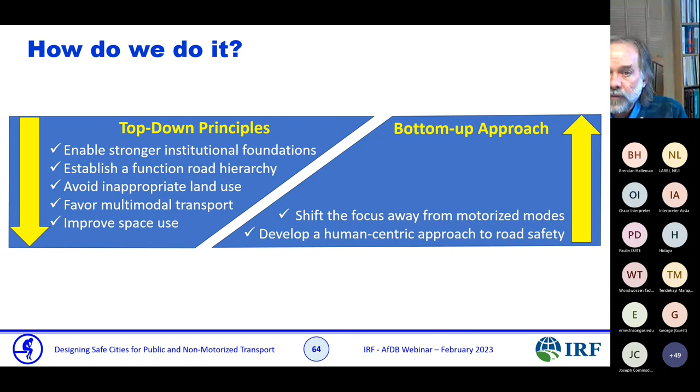On the other side, we go from the bottom up: developing a human-centric approach to road safety, making sure the human is at the center of what we do. The other one is shifting the focus away from motorized modes - stop thinking that cars should be prevalent all over, making sure that it's human-centered.

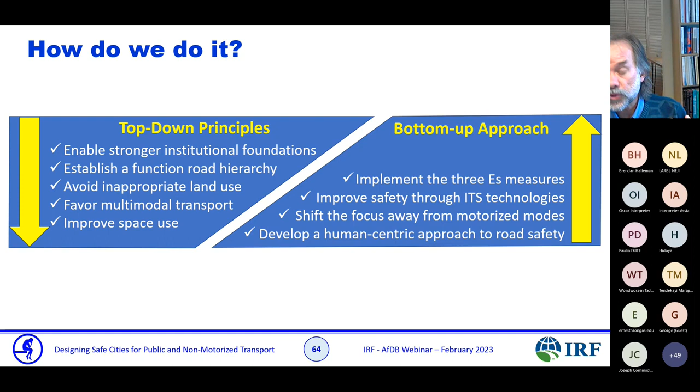The other one is improving safety through ITS technology, if we can, and how we can implement it. The other one is implementing the 3 E's: education, engineering, and enforcement, making sure that they're well implemented.

So, some key rules to remember. Remember that vulnerable users are an extremely diversified group, and they've got different characteristics and limitations. We need to understand that, and make sure that what we implement respects those limitations and characteristics.

You should remember that VRUs have their own objectives, and that's going to impact their decisions and actions. If they want to go from point A to B and the shortest path is crossing the road here, they're going to do it no matter what you do. So make sure that they can do it.

And humans don't always do what we expect them to do. They do whatever they want. They are human, and we should remember that. No matter what we put in place, they are going to be doing whatever they want.

Humans process information in a serial manner - I told you that already. They can do one thing well at a time. Actually, it's funny, because I have three daughters who are grown-up women now, and they tell me, well, women can do more than one thing at a time. Well, perhaps women can do it, but I cannot. So usually, I think people can do only one thing at a time.

And people have expectations, so that's going to influence their behavior. So if we meet their expectations as designers, we are going to help them behave properly.

Humans make mistakes, so making a mistake should not result in injury or death. I'll talk more about that in the next webinar, when we'll talk about Vision Zero and safe road, safe system approach. The infrastructure and the environment should send more information than any sign, signal, or marking. That's perhaps the most important point here.